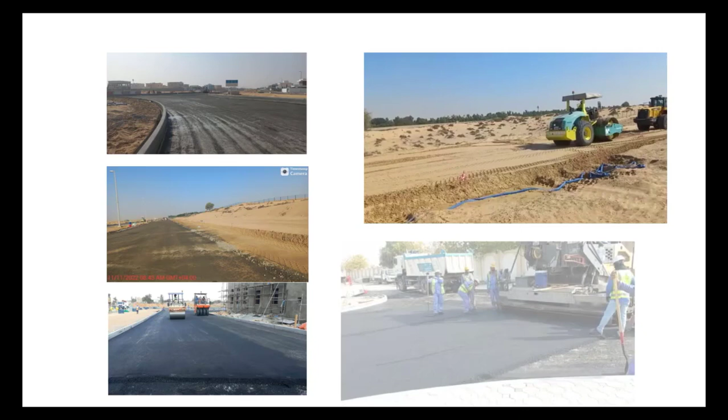Today we are going to discuss an important interview question which I faced myself in every interview: what are the steps to start a new road project? Generally it can be asked for building or other projects, but I will explain it relevant to roads. So, here are some major steps to start a new road project.

Number one, kickoff meeting. What is a kickoff meeting? In a kickoff meeting, what will be there? Introduction of the project team, project goal, background and why the project started, project scope, project timeline, and stakeholders like client, consultant, and contractor.

Number two, survey work. After the kickoff meeting, when the project team, the project goal and the project timeline are clarified, and after awarding the project to the contractor, what will the contractor do? First, the contractor has to obtain a benchmark from the town planning department, and will fix the project boundary limit. OGL will be taken and site setting out will be started.

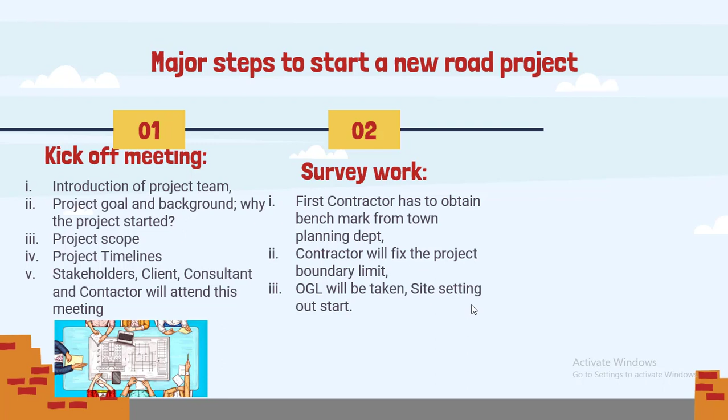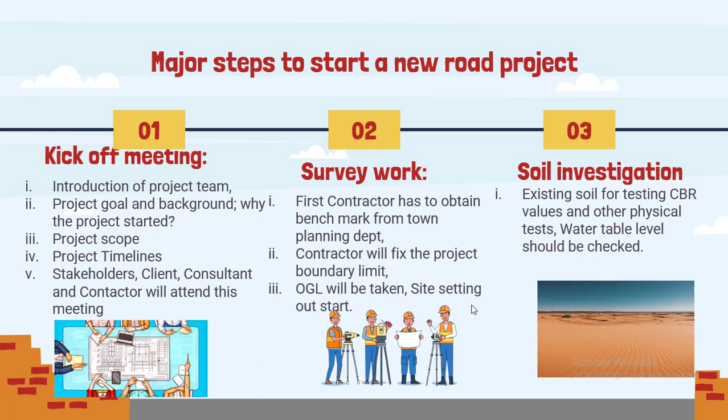After that, what will be going on? Soil investigation: existing soil testing for CBR values and other physical tests, and the water table should be checked. These things are important so that we know what kind of soil we have, because later on we will start construction according to our existing soil.

So the next step is trial trenches NOC. NOC would be taken from the concerned departments, like in Dubai there is DEWA, Etisalat, Armed Forces, street lights, irrigation departments, the environmental department, and many other departments. From there we will take NOC for trial trenches.

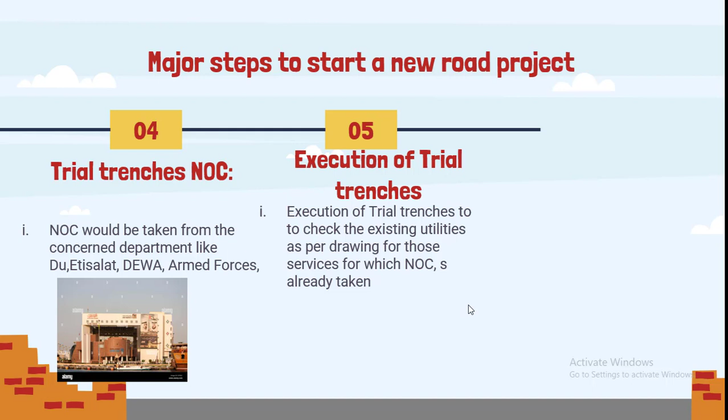Once we receive the trial trenches NOC, the next step is execution of trial trenches to check the existing utilities as per drawing for those services for which we already have NOC. Sometimes Etisalat, the telecommunication department, wants to know where their services are located. So the contractor will execute a trial trench and will give all the information.

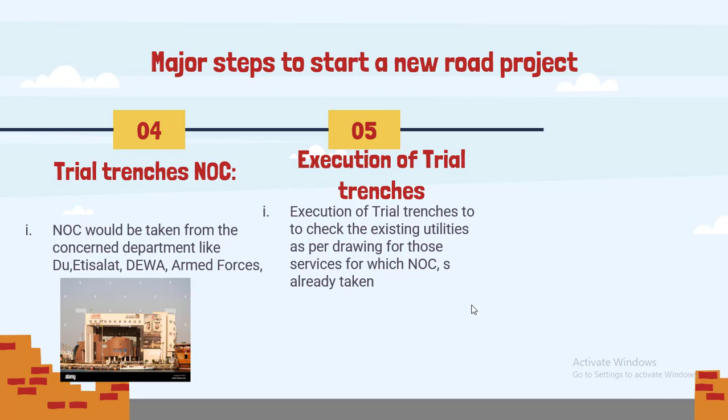Here in the picture you can see this is a trial trench where we execute, and here you can see the black pipe. So you will give all the details of these trial trenches to the consultant and the relevant authorities. You can see here the existing cable.

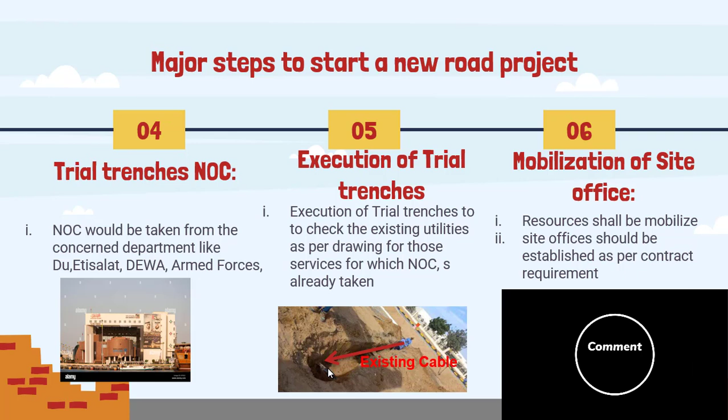Number 6 is mobilization of site office. What does it mean? It means resources shall be mobilized, and site offices should be erected and established as per the contract requirement.

Number 7, safety plan. As we know, human life is precious, so safety is first. No one should be hurt. The contractor should submit a safety plan to the engineer consultant for their review and approval.

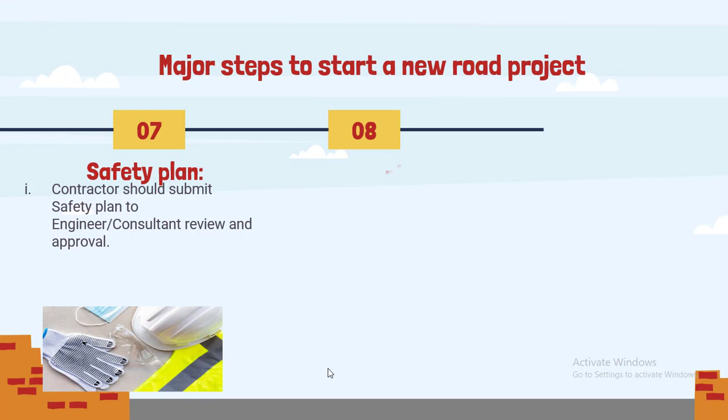Number 8, QA/QC plans. The contractor shall submit a quality assurance and quality control plan for engineer review and approval. In every project, the contractor has a quality assurance plan; they will submit this to the consultant, and after their review and approval, the contractor will do their work accordingly.

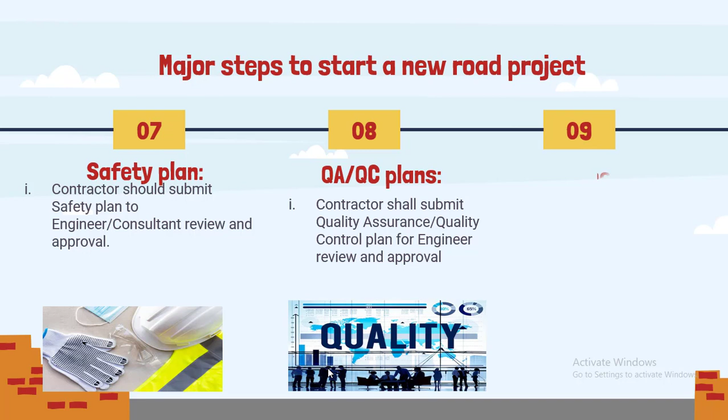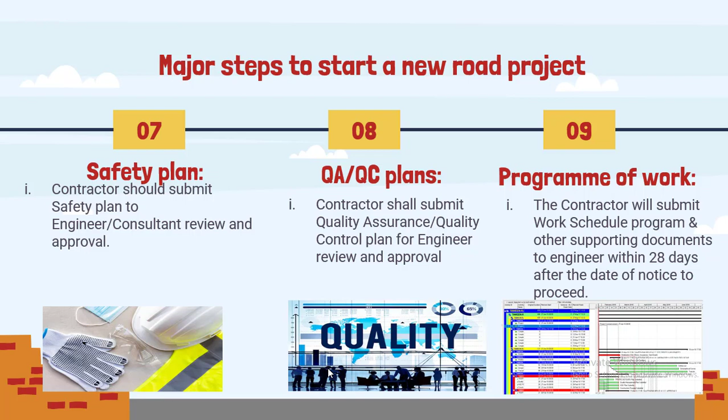Program of work. The contractor will submit the work schedule, program, that is the baseline, and other supporting documents to the engineer within 28 days after the date of notice to proceed. So once the engineer, the client or the consultant gives a notice to the contractor to proceed with work, within 28 days the contractor will prepare a baseline and submit it to the consultant for their review and approval.

So number 10 is construction NOC. As we mentioned earlier, the trial trenches NOC: once we submit it, on that basis the relevant authorities will issue construction NOCs. The contractor will take the construction NOC from the relevant authority before commencement.

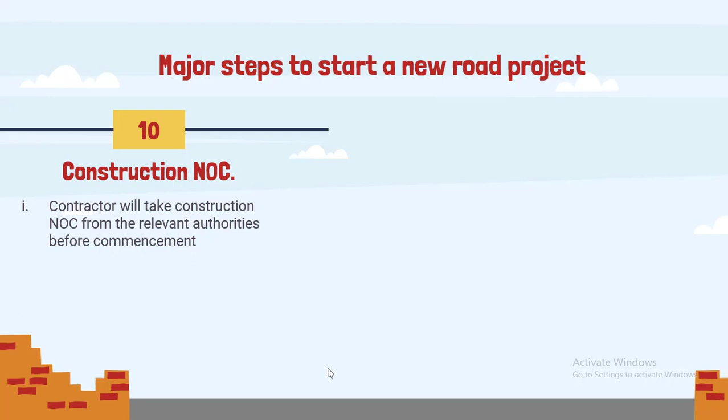It is extremely important, because if you are executing any project, the relevant authority can ask anytime, and if you have no construction NOC, or if your NOC is expired, they can fine you. So the contractor will apply for the construction NOC and have it before commencement, before the project starts.

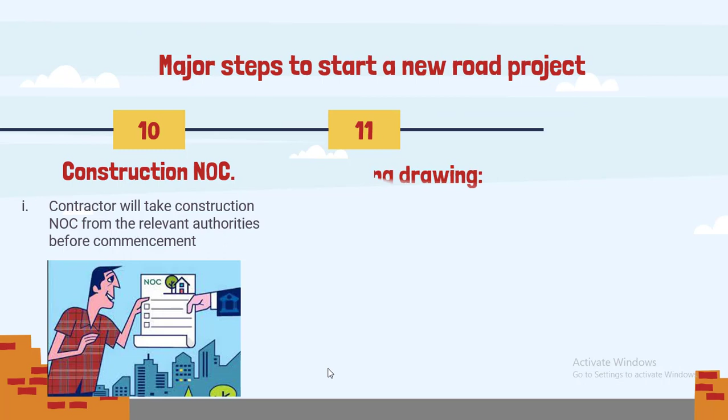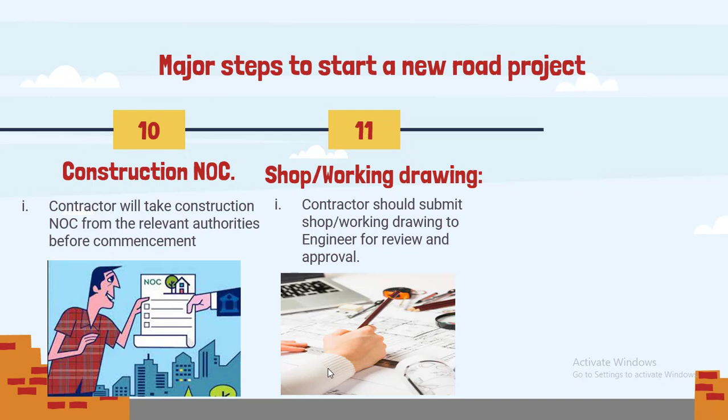Number 11, shop drawing or working drawing. Once the construction NOC is received, according to this NOC the contractor will prepare shop drawings and submit them to the engineer, meaning the consultant, for their review and approval, so that they start work accordingly.

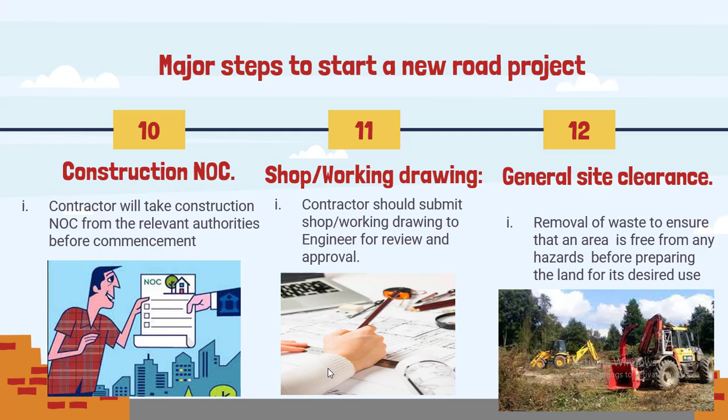Once we receive the shop drawing approval, then what will we do? We will do general clearance. General clearance means removal of waste to ensure that an area is free from any hazard before preparing the land for desired use. Like here you can see these vehicles clearing and grubbing the plants and other things, so that we proceed with other steps, like excavation and backfilling.

Number 13, existing services. What does it mean? As we mentioned before in trial trenches NOC, suppose we have a project somewhere and maybe some services are passing by this area, like potable water pipelines, stormwater pipelines, sewerage pipelines, telecommunication cables, electricity cables, or fiber optic cables.

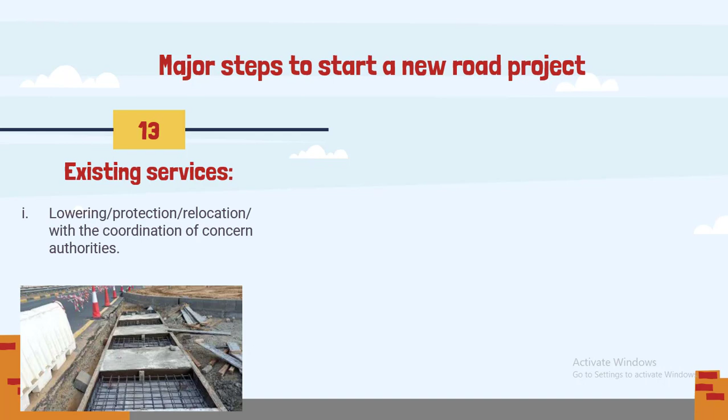In later videos I will explain how you will deal with such a situation, but for now it is enough because this is just the introduction. So we give the information to the concerned authorities: here is a pipeline, what should we do with this? There was no way to lower it, that is, to excavate and bring it down. So as per their requirement, we protected it with a concrete slab, as you can see in the picture.

So here is a lowering of existing cable. In our other project there was some cable, so the relevant authority instructed the contractor to lower the existing cable. So you can see here, we are going to lower these cables.

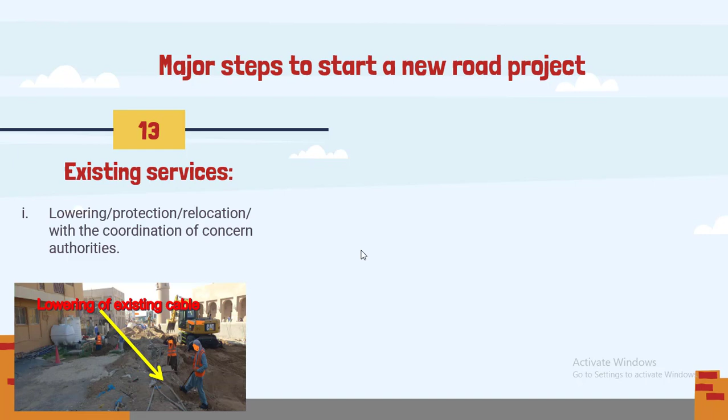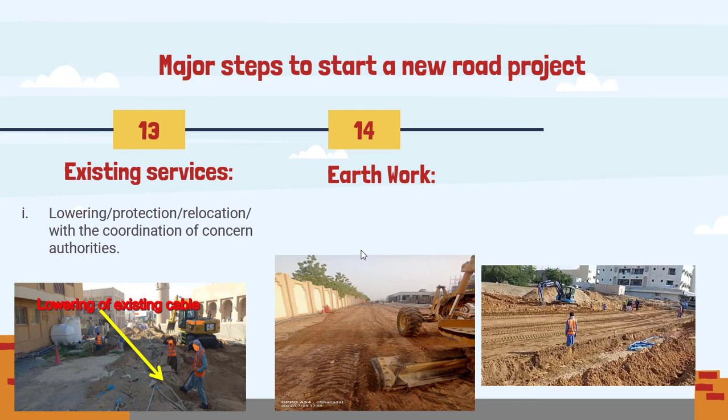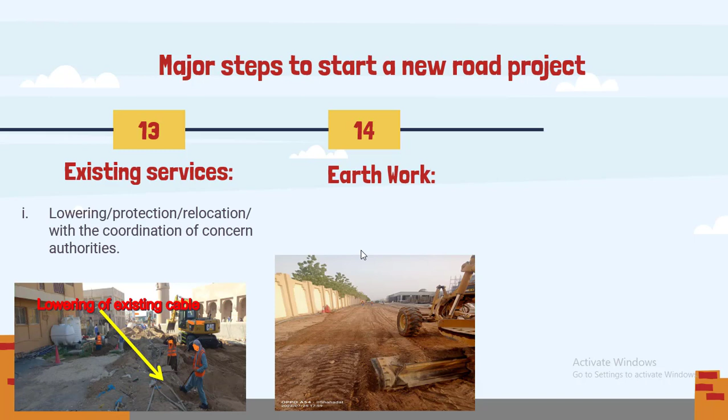Number 14, earthwork. Once we deal with these existing services, once we finish all of these, NOC, shop drawing, trial trenches, everything, after that we will start working. The first activity is cutting and filling. The contractor will go to site and start cutting and filling. After that, what is number 15? Formation preparation. You can see in the picture the contractor will start preparation of formation. After formation preparation, what is the next step?

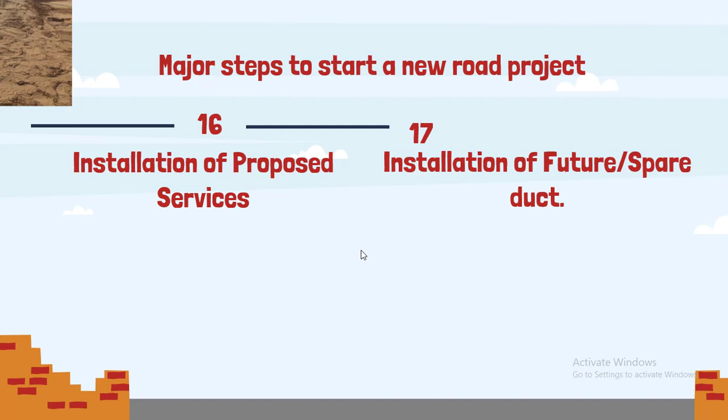Number 16, installation of proposed services. What does installation of proposed services mean? If there is street light service, electricity or any pipeline job which is proposed, we have to do it, and we will finish these services after formation.

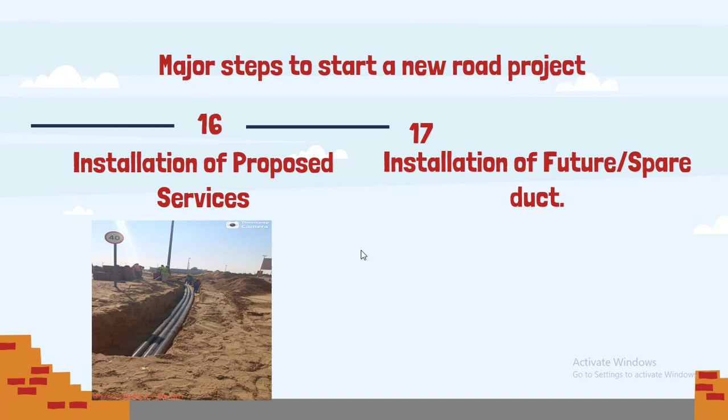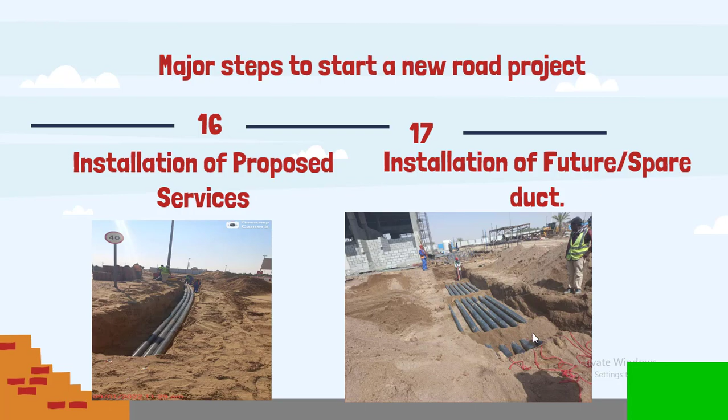And installation of future or spare ducts. What does it mean? If we are going to construct a road somewhere, it is common, you can see these are called ducts. So we are putting some crossing ducts. Suppose in future any service or cable is crossing the road, we will not dig the road, we will just pass those services, those cables, through these ducts.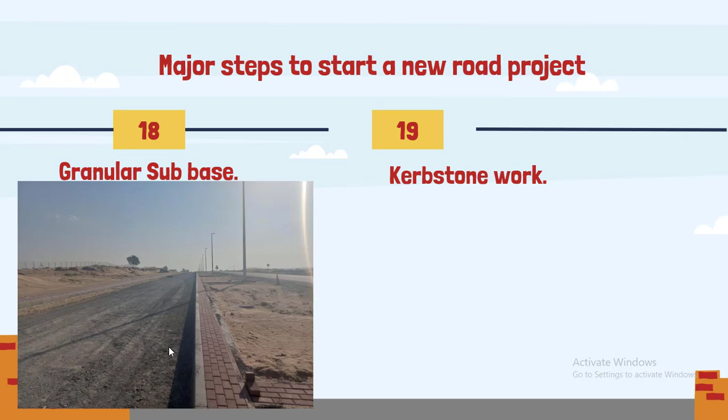So number 18, after all of these, we will lay granular subbase. As you can see in the picture on the left side, the subbase, and after subbase we will fix kerbstone and start working on the footpath. You can see in the picture. I will explain all the types of kerbstone and all of these things in the next video if I find free time.

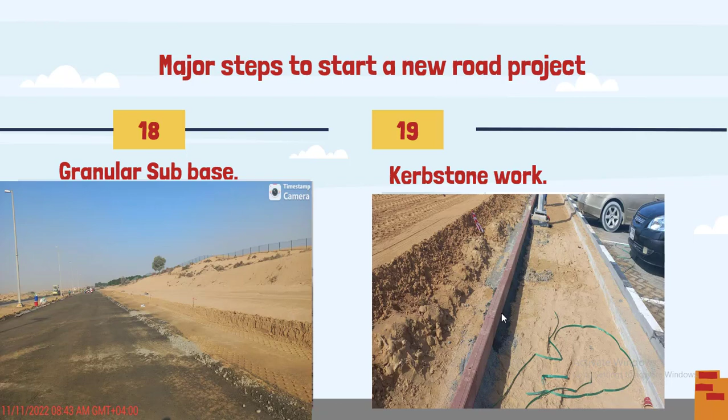To be honest, I work very hard to find all the materials along with theory to make these videos practical. I was able to make one video at site, but a lot of noise was coming, so it seemed quite difficult. Then I managed with these pictures and theory, and I think it will be more beneficial for you people.

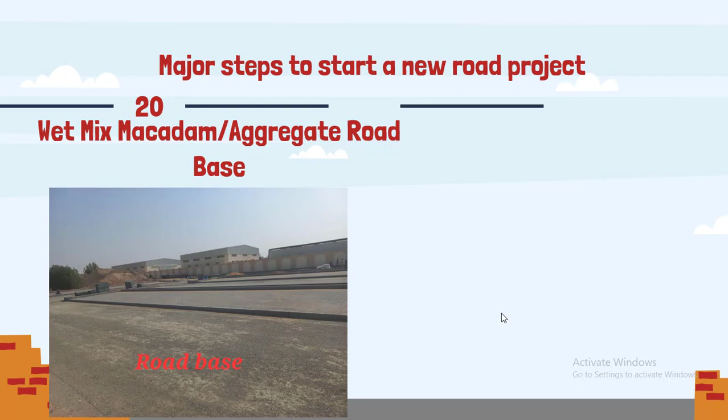So number 20, wet mix macadam or aggregate road base. You can see here the road base. After subbase, we will proceed with road base. Number 21, after road base we will do prime coat. Here you can see the prime coat spray. After prime coat spray, next day we will proceed with asphalt base course. You can see in the picture, around 60 to 80 mm, or as per the design requirement, we will proceed with base course.

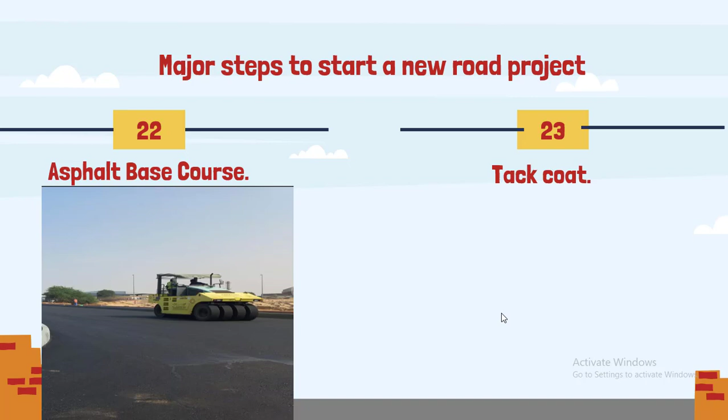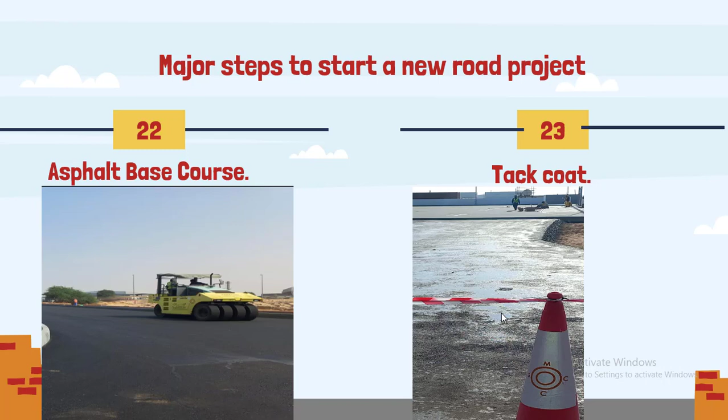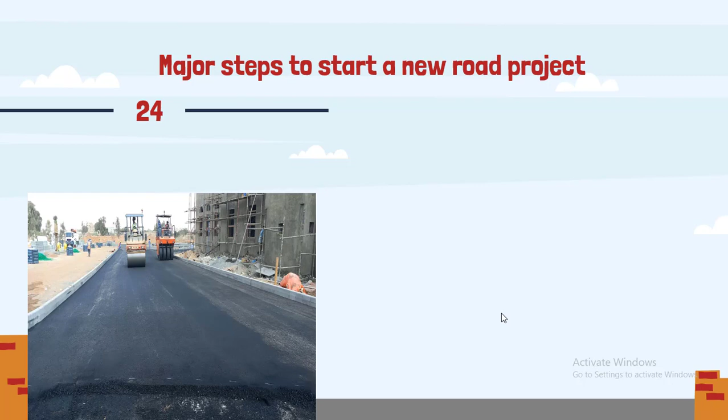After base course, what is the next step? We will spray tack coat. Here you can see in the picture, once we finish base course, we will do tack coat, that is, after one day, so that the bond between asphalt base course and wearing course is strong. So number 24, we will proceed with asphalt wearing course. Here you can see in the picture.

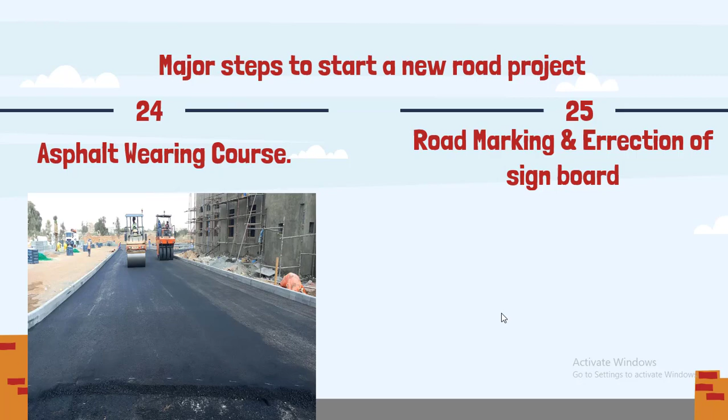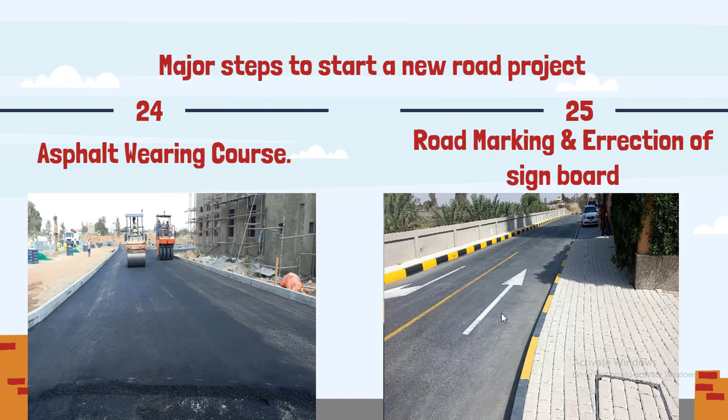So number 25, road marking and erection of signboard. Here you can see in the picture there will be some marks on the road and some signboards beside, that is, on the footpath. So we will proceed with this. So our lecture is finished.